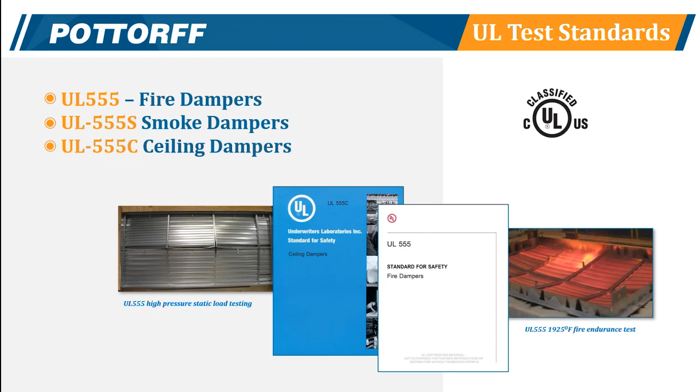So to start off with, there are 3 tests that we perform on life safety dampers generally. They're all UL tests. They're all 555 tests. 555 is a fire damper test, 555S is a smoke damper test, and 555C for ceiling dampers. And the way it breaks down is pure fire dampers have the 555 test. Smoke dampers, pure smoke dampers, are in the 555S. Combination fire smokes get both of those tests, the fire and the smoke test, and then the ceiling radiation dampers go through 555C.

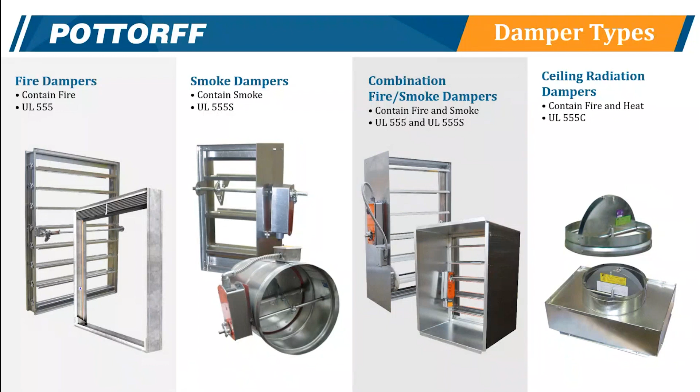So we'll talk a little bit about each test, starting off with 555, that's the fire test. And the big part of this test is the fire. We actually burn these dampers for an hour and a half or 3, depending on the rating we're going to. We have to test them both ways, vertically and horizontally, as if they were mounted in floors, if we want ratings for both. So you can't just test one way and have approval for both.

So we test both ways, and then immediately after the fire, we apply water from a fire hose to the face of the damper, across the damper, to see if the force of the water will open the damper up to the point where fire might pass through it. And that's the big part of the fire test, or the UL 555 test.

There are some more things that go on, particularly for the dampers that are rated to close under flow. We have a dynamic closure test, and that is where we run heated air through the damper and we close it several times to make sure that it will close. We only do that on the dampers that are rated for closure under flow. Static dampers don't have to have that.

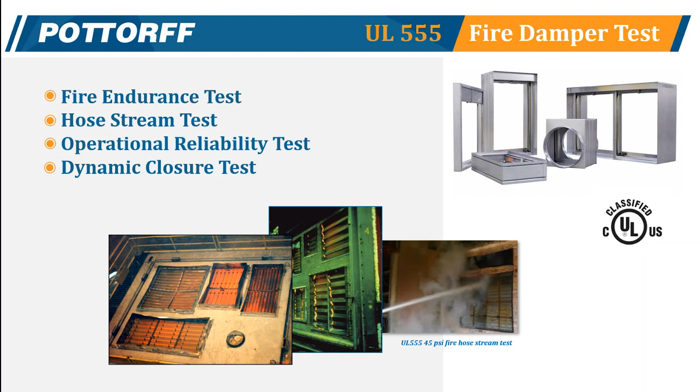555S is a smoke damper test. A lot of cycling involved in this test. The actuators get cycled several thousand times: 2 position, 20,000 times, modulating, 100,000 times. That takes a long time, so there's a lot of that. Again, some more smaller parts of this test, but also the leakage class. Of course, we're concerned about leakage of air through a smoke damper. We're trying to stop smoke, so we test them for leakage.

There's a leakage class that we rate these in. Leakage classes 1, 2, and 3, 1 being the best. 1 means that no more than 8 CFM leaks through the damper when closed per square foot under 4 inches pressure. Class 2 is 20 CFM. That's the minimum that's allowed in our codes for smoke. There is a class 3 that we really can't use, in the States at least, for smoke. But there are some class 3 fire smoke dampers out there that you might consider for a pure fire damper in certain situations, and I'll touch on that more later.

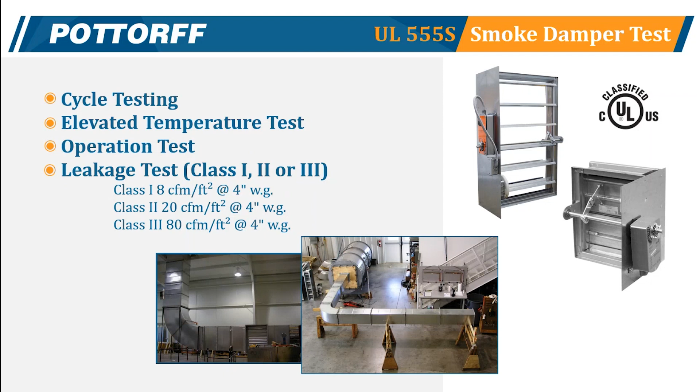Then 555C is the ceiling damper test. Again, sort of like the regular 555 test, there's a fire test involved with this. Ceiling dampers basically assume the rating of the assembly that they're going into. So we build an assembly that we want to be part of, and we burn it. And that's the big part of that. There are also some other smaller parts of that test, but that's the big part. So that's for ceiling fire dampers.

They are not interchangeable. So you cannot use a UL 555 damper in a ceiling or a 555C damper in a normal fire damper wall or floor. So I'll touch on that more later too.

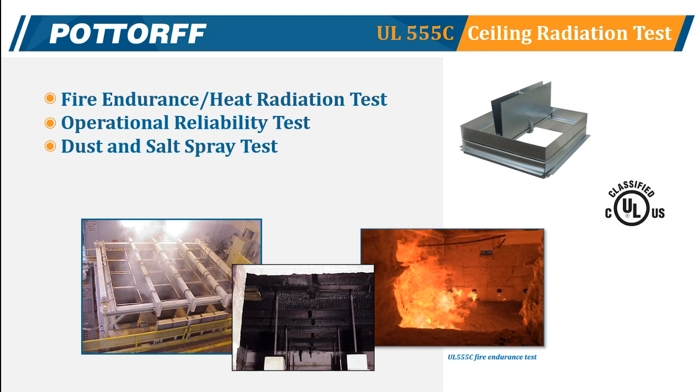So all these dampers will have a label on them to show you what they are. And this label usually is on the inside of the damper, maybe on a blade or the inside of the frame. And so for this example here, we have a fire smoke damper label. And it will show all of the ratings that this damper has.

All right, back to the label. So I mentioned that all these UL dampers will have a label on the inside of them to show you what they are. It will tell you what the damper is and what the ratings are of that damper.

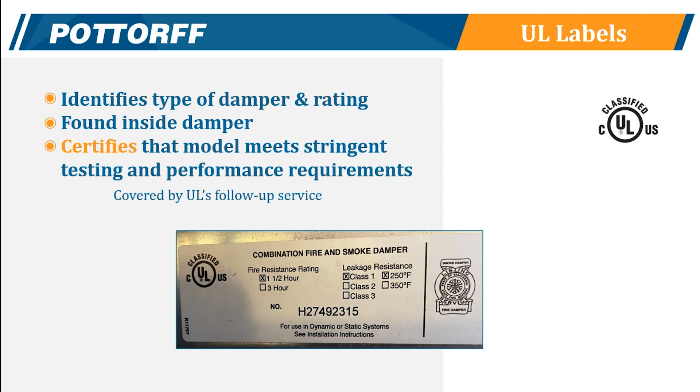Okay, so now we're going to talk about the different styles of dampers out there. And we're going to start off with fire dampers. Fire dampers are devices that stop the spread of flame across from one side to the other through ductwork in a wall or floor. They are automatic, so that's one thing that we mentioned here, and that I'll bring up is that fire dampers will come with the trigger or the link or fuse link that will close it.

So not the case with smoke dampers. Smoke dampers don't standardly come with a sensor for smoke, but fire dampers will. So they will automatically close whenever they get hot in the event of a fire. So three main types of fire dampers here. On the left, we have curtain style dampers.

We call them curtain styles because they have a series of interlock blades at the top of them that are held together or held up by a fuse link right there. And so when that fuse link melts, those blades fall and form a steel curtain and stop the fire from spreading across. Horizontally mounted, there are also springs to help close them, pull them over to the other side, and stop flame from spreading across. So curtain style is the most common type of fire dampers.

In the damper world, they're kind of the lowest cost. Everything, for the most part, is roll formed. Not a lot of human labor involved in building them, so the cost is somewhat low. But they are also somewhat limited in size and airflow. So multi-blade dampers in the middle here, that's another style.

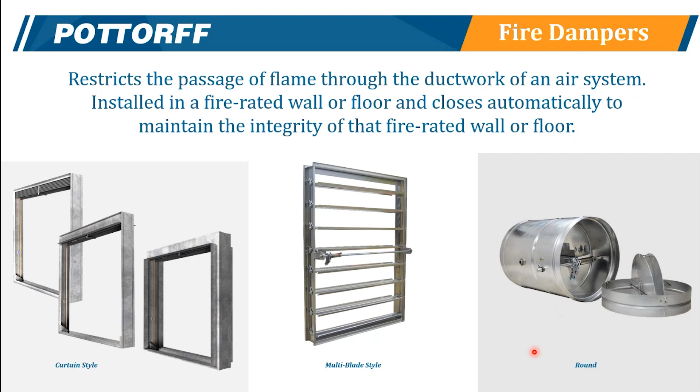And then there's also what we call true round dampers. So that's where the damper frame is actually round. Now we can do a square-to-round on almost anything, but these dampers, the frame is actually round itself. All of these are fuse link dampers, so they all have a melting fuse link that melts and will trigger the damper to close. Fire dampers are rated for a couple of different things. One of them is airflow, and the other is time.

So airflow, there are dampers that are designed to close with airflow moving through them, and those will close under at least 2,000 feet per minute, 4 inches pressure. And this rating applies to fire dampers and also to fire smoke and smoke dampers. All fire smoke and smoke dampers are rated to close under flow. Static dampers are dampers that are designed to close without any air moving through them. So to use them, your system must have provisions to shut down the fans, shut down the air handlers, etc. So if you have that, you might be able to use a static damper. Static dampers usually cost a little bit less.

But the main difference is really in vertical mount dampers. The dynamic dampers that close under flow will often use springs, and it's kind of hard to see, I know, in this photograph, but there is a stainless steel ribbon spring right here that connects to the bottom of the frame and to the first blade in the blade package, and there's one on this side too that you can't see. So when that fuse link melts, that snaps that damper down and closes it. Static dampers vertically do not use springs, so it'll look like this. There will be nothing there.

Now, not all dampers that are rated for flow will have these big ribbon springs. Some companies will use, on small sizes, a very small spring in the very top of the blades. But when they get very large, then they'll have these ribbon springs. Horizontal mount all use springs. So whether they're rated for flow or they're static, they will all use springs because that's what closes them.

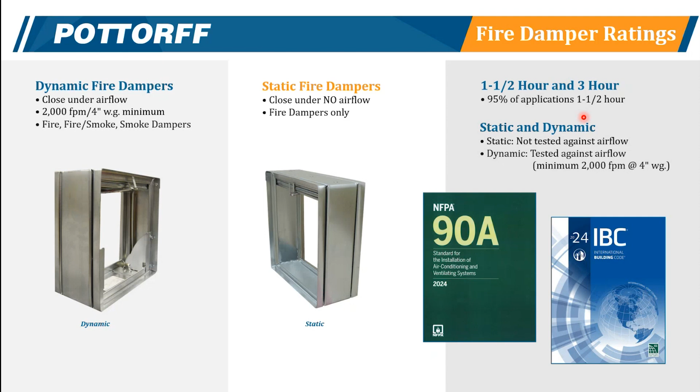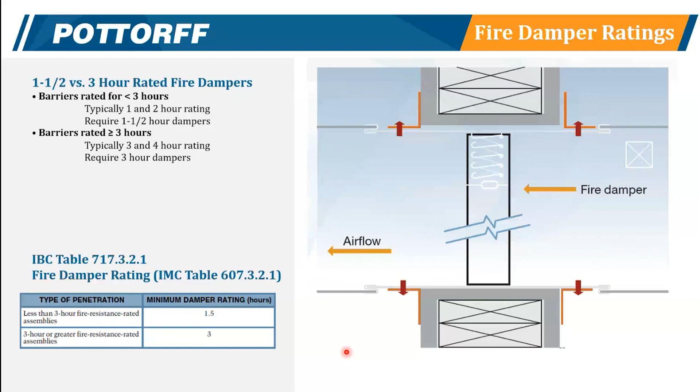And then time-wise, fire dampers are rated for either an hour and a half or 3 hours. Generally, the large majority of the dampers we build are hour and a half rated, but we do make a lot of 3-hour dampers too. So about the ratings, hour and a half, you might think, well, that's kind of a weird rating. And you might think, well, if I have an assembly greater than that, I need to use a 3-hour damper, but that's not the case. So the code says anything rated for less than 3, you use an hour and a half damper. So for example, if you have a 2-hour wall, you do use an hour and a half rated damper.

With these curtain dampers, we run into what we call the blade package, and that is the interlock blades at the top of the damper, like we have here. And now these photographs here, these are all small dampers. They're probably 8x8 or 10x10. They're very small, so the blade package is not very much. It's maybe 1.5 inches or so.

But these dampers can get much larger, much taller. And then when they do that, that blade package becomes several inches in height, and that's blocking your airflow on your duct. So we've developed different frame types that can help reduce the effect of the blade package on the airflow through it. So an A-type frame is a type that you connect the duct to the entire outside of the damper, the perimeter of the damper.

So everything is in the airstream: blade package, frame, legs, etc. It's all in the airstream. The B-type has a little hood or flange on the top of it that brings a top duct connection just beneath the blade package. And so it essentially gets the blade package out of the airstream.

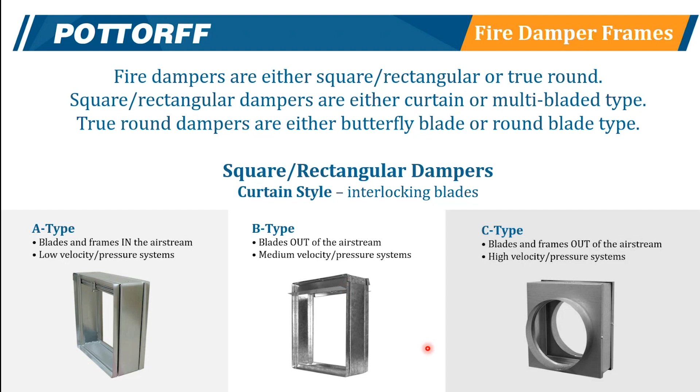Also, most fire dampers and fire smoke dampers need a sleeve, and the point of that is so that if something falls in the ductwork or in some way breaks the duct away, and most of these are connected to the sleeve with a breakaway connection, the sleeve will remain in the wall or floor with the damper in it and protect the opening from the fire.

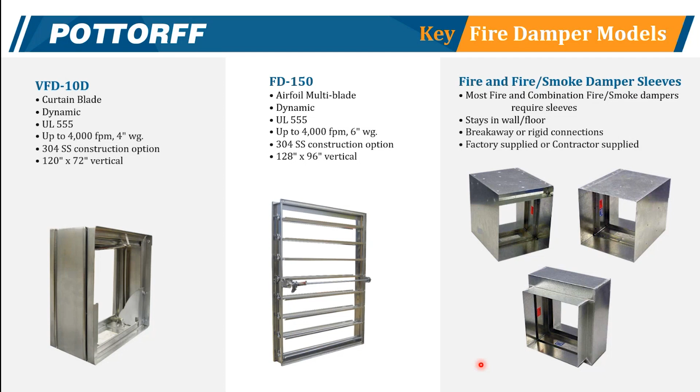Smoke dampers are devices that stop the spread of smoke. As I mentioned before, they're rated for leakage classes. In the States, we can use Class 1 or Class 2. The code doesn't really say you have to use Class 1 here or Class 2 there. It leaves it up to you, but the most critical places are probably where you want to use Class 1, like hospitals, schools, stairwells, etc. are all places where you might think about using a Class 1 rated damper.

They are rated for 250 or 350F. You would want to use a 350 rated damper, certainly if the damper is going to be used during the fire to create pressure zones and manage smoke. You would want the higher rating for that. And then all smoke dampers are rated for airflow. There are no static smoke dampers. They're all rated for at least 2,000 feet per minute, 4-inch pressure. The actuators on smoke dampers and fire smoke dampers have to be provided from the factory. We have to mount them on the damper.

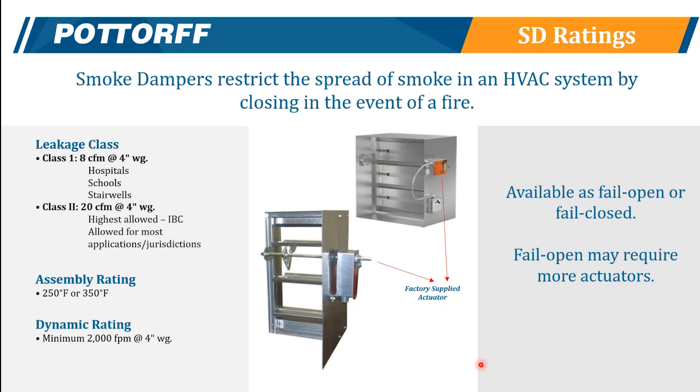We cannot provide these dampers without them and have the contractor put them on out in the field. So they have to come with it. Most smoke dampers are fail closed. That's kind of the way that they started out and the way that most of them are, but there are some fail open options. If you have, say, an example where you want to move smoke out, you want to purge smoke in the event of a fire, you can have fail open, but it may affect the number of actuators on the damper. It may have to have more to be fail open.

And then the combination fire smoke combines, of course, the fire and the smoke damper together. So it's leakage class rated, it's temperature rated, it's rated for airflow. The actuators are mounted on them at the factory. And I'll mention here, I think I touched on it before, but Class 3 fire smoke. Now, codes, well, you must use at least a Class 2 rated damper here in the States. But a fire smoke damper, as soon as you hook it up to power or hook air up to it, it's a fire damper. And you don't ever have to connect it to anything to do with smoke. It can be used as a pure fire damper.

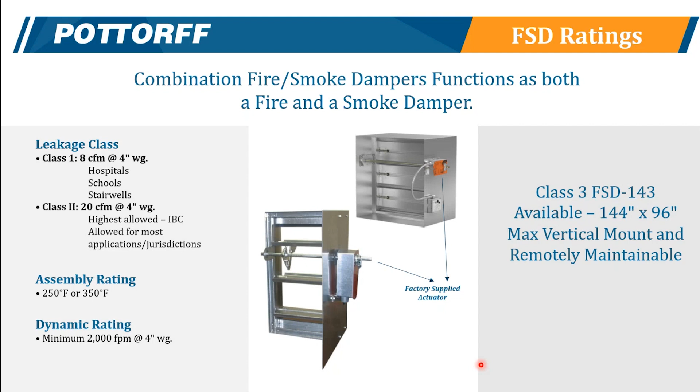And these FSD 143s can go up to 144 by 96 vertically. So they go quite large. It's the largest fire damper that we offer. And that's typically going to be the case with a fire smoke damper; it's typically going to be larger than most fire dampers. So in situations where you've got very large sizes or where your damper will be in a place where it's going to be very hard to get to it after it's put in to maintain, you might consider using a fire smoke damper. The codes now allow motorized dampers with blade position switches to be remotely tested or cycled, which is required now. So it's another reason why you might think of that. Food for thought for you there.

304 stainless is optional. Modulating and vertical blade options are also available with this model. Now that's not on all fire smokes. Only certain models will have those options, but this model does have that. Modulating allows you with a signal in to manage the blade position and basically use your fire smoke damper like a balancing damper until there's a fire, and then that part is overridden and it becomes full closed generally in the event of a fire. So 128 by 96 max size with the FSD 151.

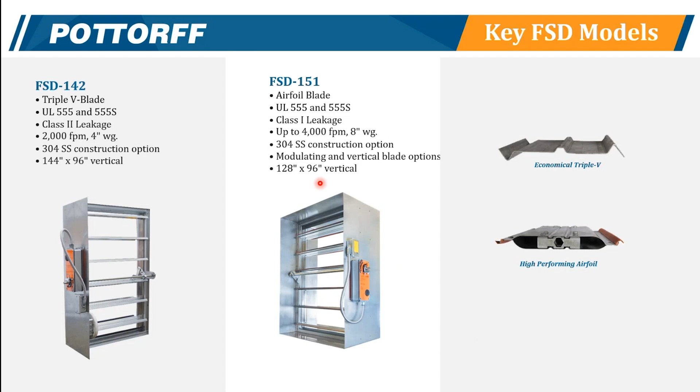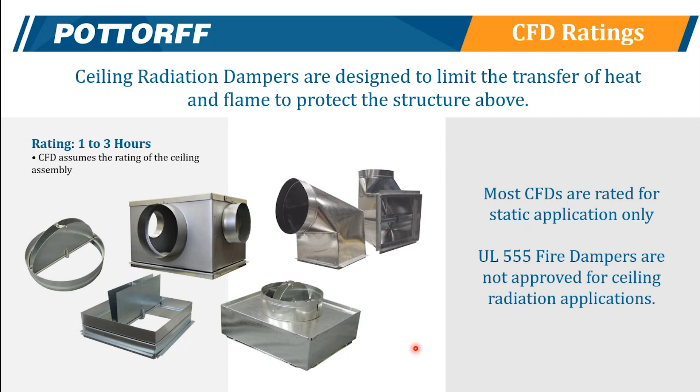Ceiling dampers. So this could be a whole other talk on itself. This is a lengthy product line, and it's a little bit tricky on how to apply these, but we'll hit the very high points here. Ceiling dampers do two things. They protect a floor ceiling assembly or roof ceiling assembly from both fire and from heat. So that's a big difference. A UL 555 fire damper protects from fire but does not protect from heat, but a ceiling damper also protects from heat. So that's one of the reasons why you can't use a normal 555 fire damper in a ceiling.

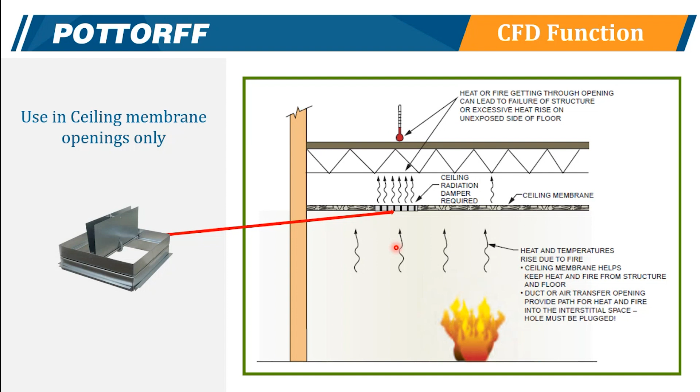And this is an example of what we're talking about: a floor ceiling assembly. Imagine this being a wood structure. Generally, these are most often used in wood structures. So you'll have a wood truss assembly here, and when you penetrate just the lower membrane of this assembly, the ceiling part, that's where you use a ceiling fire damper. You don't use it in the floor. If you were going all the way through this assembly with, say, a duct or a shaft, you would not use a ceiling fire damper. It might be a 555 damper, might be a fire smoke if it's a shaft, but not a ceiling fire damper. But if you're just going through this lower part here, that's where you use a ceiling fire damper. And that damper is protecting not only from fire, but also from heat that radiates up. Radiation damper is another name that is commonly used for these, and that's why.

Hey, James, we have a quick question from Matthew. Does the modulating type damper remember its balancing position after a fire?

That's a good question. I don't know the answer to that one. We will have to find that out, and we will get back to Matthew on it. Yeah, I'll make a note of it.

Okay, thank you. So these ceiling fire dampers, unlike a normal fire damper, assume the rating of the assembly that they're going into. So basically, they're listed in the UL listed assembly. For example, L521 is a listing for a wood truss system that is a UL listed assembly.

To find that, you can go to UL's website. UL has a search called Product IQ that is free to use. If you know the listing number of the assembly, you can type that in, and it will bring up a PDF of the listing. In that PDF, you will see what that assembly looks like, what it's made of, and what dampers, if any, are allowed.

Now, sometimes you'll pull these up and it'll be an assembly that dampers are not allowed in, and that could be a problem. But generally, if dampers are allowed, it will specifically tell you what models, what brands are in it. So we encourage you, number one, find out what the assembly number is. Sometimes that's not easy to do, but you want to do that, and then check your listing on UL to make sure the dampers that you want to use are in that.

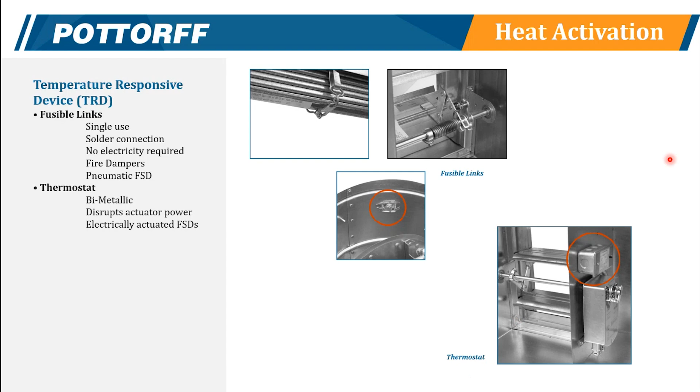Smoke dampers are a little different story. Smoke dampers do not standardly come with a sensor to sense smoke. They typically will need help from the system outside of it to close it. Now, smoke detectors are available. We can provide them with the dampers in a sleeve, and we have flow types and no flow types available.

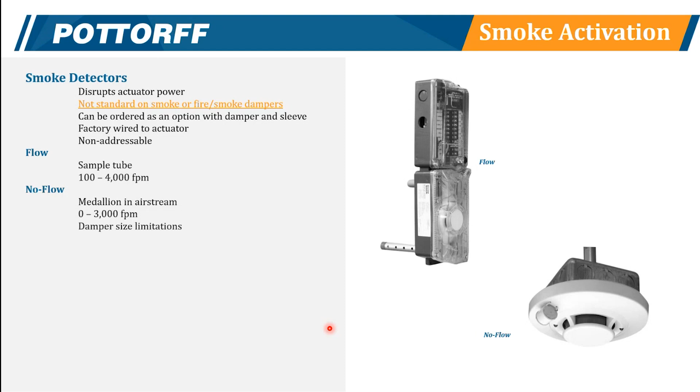But it's not standard. It's an option, and generally, of the total number of dampers we build, we supply a fairly small amount of them with these. A lot of times, a different trade will handle the smoke system, so we don't have it. But it is available. It is an option. You do have to specify it and order it.

Actuators, I touched on that a little bit before. Actuators on smoke dampers and fire smoke dampers have to be provided from the factory. They can be externally mounted so that they're out of the air stream like we have in the top picture, or internally mounted so that they are in the airstream. There are size limitations on how small we can go with an internally mounted motor, but there are options. Generally, these are two-position spring return, so they're full open, full closed.

24 and 120 volt are very common. Some will go up to 230. Modulating is an option for some models, so you can manage the position of the blade with a signal in. Pneumatic is also available still. That's something we don't sell a lot of right now. It used to be more common back in the day, but fewer and fewer, mostly retrofits now. The volume of those is small enough that we don't keep a lot on hand, so it might affect your lead time a little bit if you go with that style.

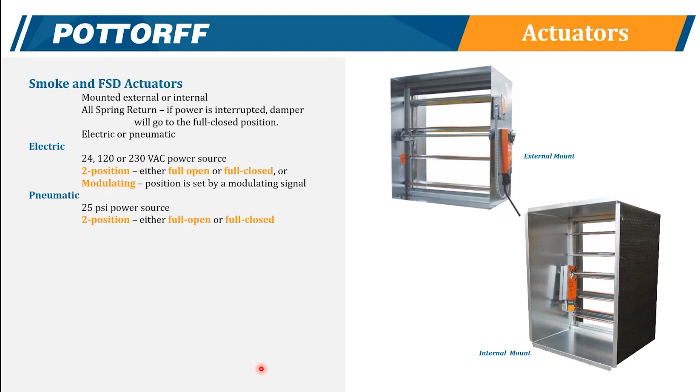Okay, now we're going to get into a little bit about how you install life safety dampers, just touching on the very high points. The first thing I'll mention is that you always want to go to the installation sheets for the precise models that you're using. We get asked from time to time, what's a good general detail I can show on my drawings of how to mount a fire damper that would apply to all? And the answer is there is none. A lot of us are very similar in how you mount these, but they're not exactly the same. So you want to follow the exact details of the models that you're using.

So getting it, and so we provide these with all these dampers. So every order there will be a physical set of these that ship out with the damper, and then if they are lost for some reason, they're very, very easily found on our website. Now I will show you in a few slides where to find those.

So starting off with smoke dampers. Smoke dampers are a little easier because there's fewer rules with them. For example, they don't have to be in the wall. They don't have to be sleeved. They can just be mounted in a duct, etc. They can be up to 24 inches outside of the barrier. You just can't have anything coming out of the duct in between the barrier and the damper. There are some rules about mounting the damper frame into the duct, and maybe some sealing involved, but that's it.

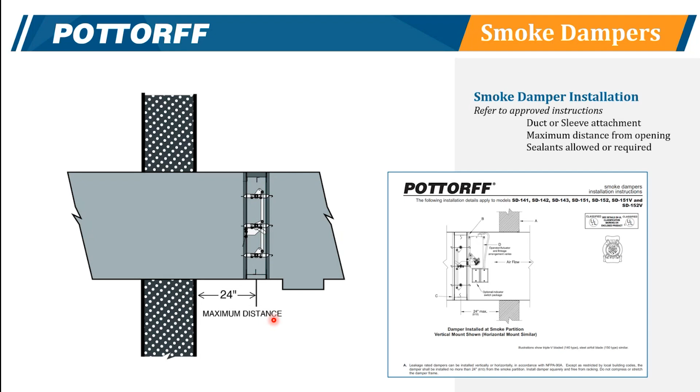So they're pretty simple. Fire dampers, they're trickier. There's more rules with them. Starting off, typically they have to be in the wall, in the plane of the wall or the floor that they're mounted in. So when we're showing a curtain style damper here, when that fuse link melts and that curtain falls, that curtain must be within the plane of the wall or floor. Now we show it centered here. It doesn't have to be centered. It could be more to one side or the other, but it has to be in the plane.

That's probably 90% of the fire dampers that you see. There are out of partition dampers available, and some call them out of the wall dampers, where they can be outside, and we'll touch on those too, but generally that's the case. They have to be within the barrier.

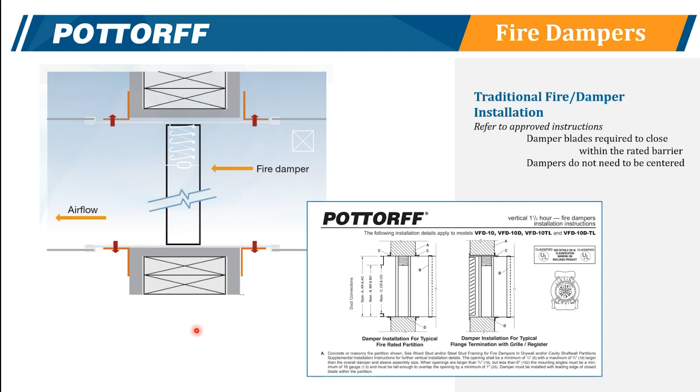Hey, James, I have another question. Yeah. This is from Lucas. I understand that fire dampers do not require sensors or power because of the fusible link. However, are they required to have sensors to have them monitored by the fire alarm system? No, they are not. Now, we do offer a blade position switch that would trigger when a curtain damper is closed. We do have that, but it's not necessarily required. And we have blade position switches also for the fire smoke dampers too. And I think I have a slide on that, so I'll touch on that too.

Okay, so angles are typically used to mount these fire smoke dampers. They do two things. They hold them in place on the wall or the floor, but they also seal off or safe off the gap in between the damper and the opening. There has to be a little bit of gap there. These dampers, when they get hot, they have to be allowed to expand, but not bind up so they wouldn't close. So there's a little bit of gap, at least an 1/8 inch around them. So the angles help safe off that space, and then they also hold the damper in place.

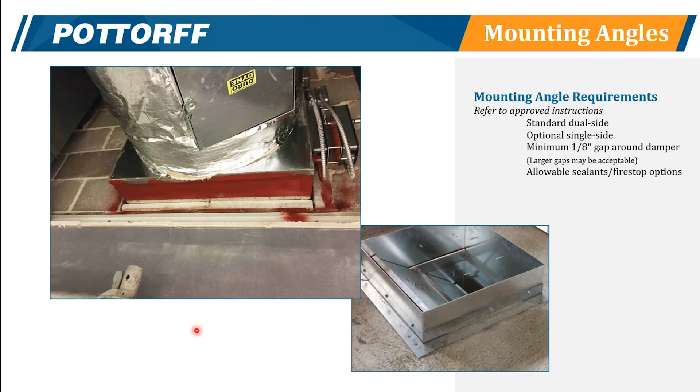Now, 1.5-hour rated dampers up to a certain size, a pretty good size, can be mounted with angles on one side of the barrier only. They don't have to have them on both sides. Both sides is an option. You can put them on both sides, certainly, but you don't have to. And that's all shown in the sheets that come with the dampers. There are some size limits. They're only for 1.5 hours, but that is an option. Getting your inspectors to accept that may be another challenge for you, because sometimes they won't accept angles on one side, but that is allowed in certain cases.

So I mentioned there are out of partition dampers where the damper can be out of the barrier. This is an example here. We call these OPs, and the sheet here is our installation sheet for some of our fire smoke models, the triple-V and the airfoils. And these can be up to 12 inches outside of the barrier. And how we do this is the sleeve is wrapped in a fire and heat resistant blanket to protect it from the heat. And that allows it to be outside.

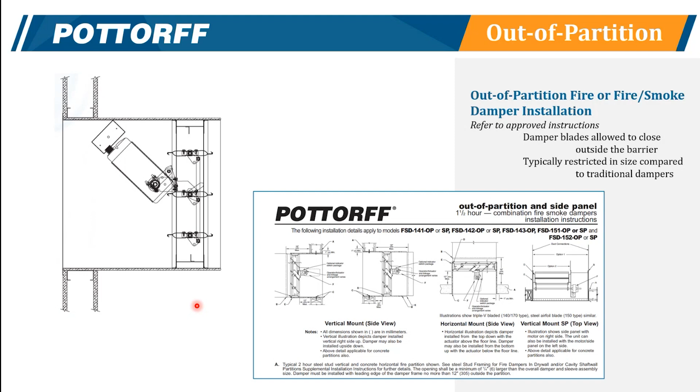There are some size limitations, though, with these. That's the main thing to keep in mind, is that these don't get very big, generally about 3 foot square. It'd be about as big as they usually get. Some might get a little bit larger, but we do at least have that size. So it could be a solution for you if you have a problem on a job where you just can't get the damper inside the barrier. You might consider an OP style damper.

Also, sort of the same vein, another out of partition style damper is our side panel dampers, and these are dampers that are designed specifically for use in shafts and rated shafts. Knowing that it's very difficult or impossible to get to the backside of the damper, it's installed in a shaft. These dampers are provided with a front flange.

You slide them in from the front, and then you run screws or rivets through the sleeve into the shaft wall framing, and that's what holds them in. You don't have to get to the backside to put anything on the back of them. The actuators are here in the front, so you can get right to them. If you terminate here at the damper, you can install a grill and put that there too.

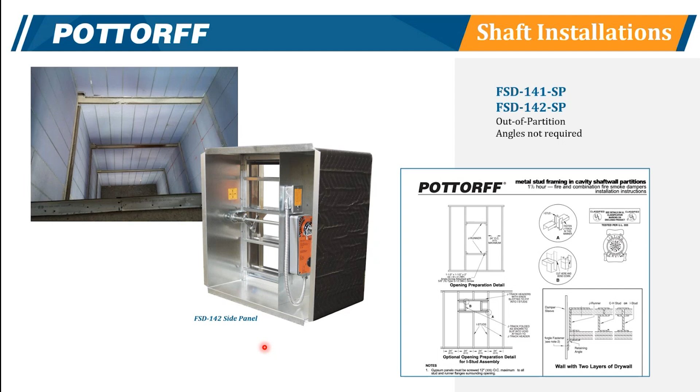So very, very nice option for you for shafts. Again, sort of limited on sizes. They'll go a little bit larger than an OP, but not much. But most of the time these openings are not huge to begin with, so they work fine.

True round dampers. These are dampers where the frame itself is round, and we make these in fire smoke dampers. We do 6-inch to 24-inch. Sometimes we're asked, well, do I have to cut a round hole for these in my wall? No, you can do a square hole. Our mounting plate is a square plate, so square hole works fine. But very, very nice option if you're using spiral.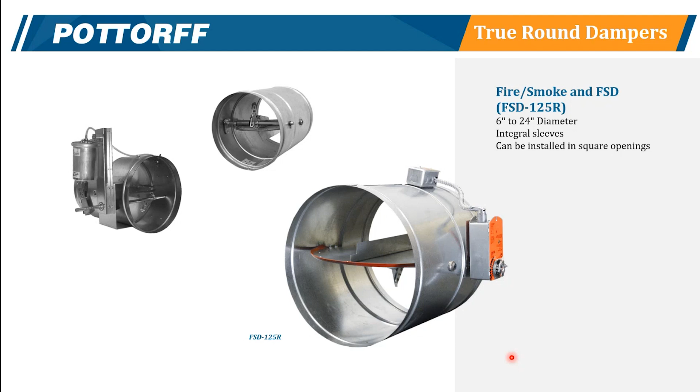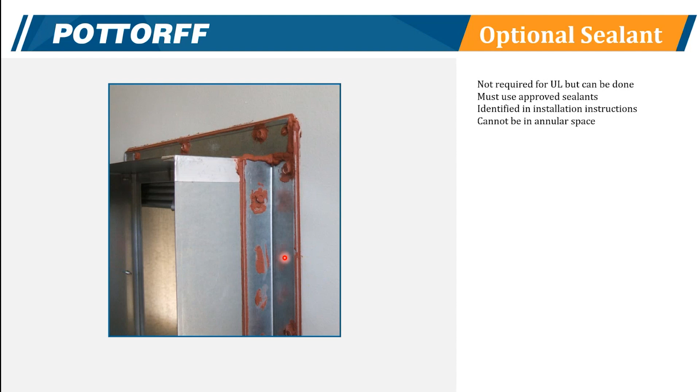Now, sometimes we're asked, do I have to seal the angles and the fasteners and such on the damper for the UL listing? And the answer is no. You don't have to do that. You can do that. You have to use the right sealants. There's only certain sealants that you can use. But if you're concerned about leakage out of the duct through the screw heads or around the angles, you can seal all of that with the proper sealant. So that is an option.

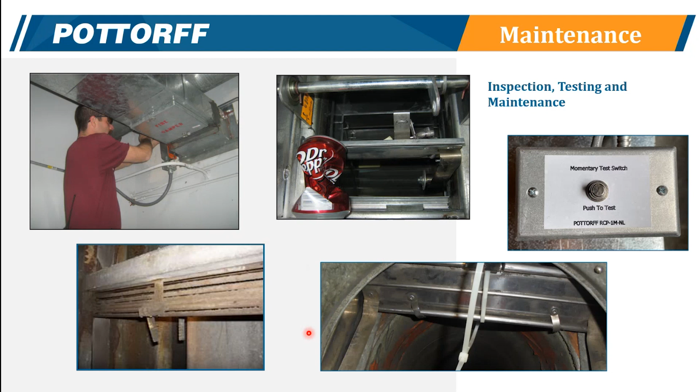So the IBC refers to NFPA for maintenance and testing of dampers, NFPA 80 for fire dampers and 105 for smoke and fire smoke dampers. What 80 says is that there's a series of tests to perform on these life safety dampers to make sure they're working correctly. There's one right after you put it in to make sure everything is in place and working. Acceptance testing happens generally whenever the system is cranked up and turned on, and it's often when the building is turned over.

That's the acceptance testing. After that, 1 year after the acceptance testing, and then every 4 to 6 years. 4 years for normal commercial buildings, 6 years for healthcare. Healthcare groups lobbied to get a little bit longer cycle so that people didn't have to shut down their systems as often and get in their ceiling tiles and stuff. So they go 6 years. But what that means is that the building owners are supposed to cycle these dampers, and in the case of a fire damper, they have to close it and reopen it every so often.

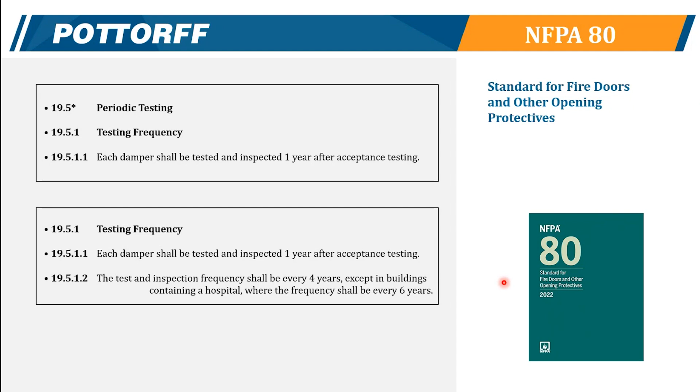With pure fire dampers, that means you have to get to the damper. There's no way to close it without removing the fuse link and letting it close and then reopening it and reinstalling the fuse link. That's the only way to do it. And you can imagine a healthcare facility, for example, that's got thousands, or at least hundreds, of fire dampers. That's a big job. It's a big task.

NFPA in 2019 revised the language of the standards to allow remote testing of motorized dampers with blade position switches, so that you can remotely test, say, a fire smoke damper that has an actuator and blade position switches to indicate when the blades are closed and reopened. So that's a big change. That allows a building owner now to maintain these without actually having to get to the dampers.

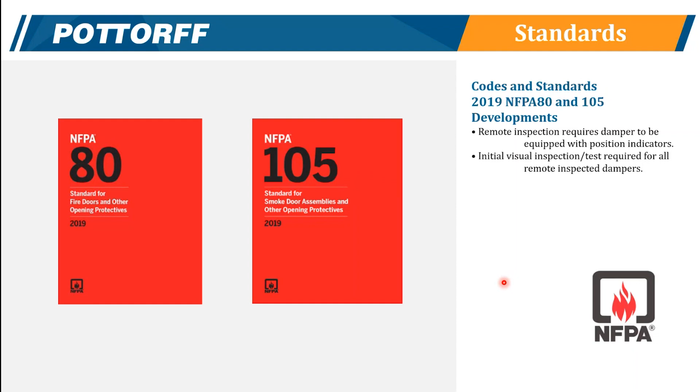The language says you have to witness the first remote test. So the first time you trigger the damper remotely, you have to see it, make sure it's working. After that, you don't have to see it again. So huge thing. Another reason why you might consider a motorized damper in lieu of a pure fire damper. So we offer some options to make it easier to maintain and test these dampers.

Remote control panels, or for us, RCPs, is one way to do it. These combined with the blade position switch will allow you to close the damper by just flicking the toggle switch here. In this case, this is our RCP1 panel that has red and green lights to show you when the blades are open and closed.

These are connected into our PI50 blade position switch, and so you can see very easily when the blades are open and closed. These are options. These are not standard. You need to specify and order these to get them, but they are optional, and it makes it easier for the person or the group testing these to actually do that. And they don't have to be on the damper. This one is shown on a damper, but they could be remotely mounted too.

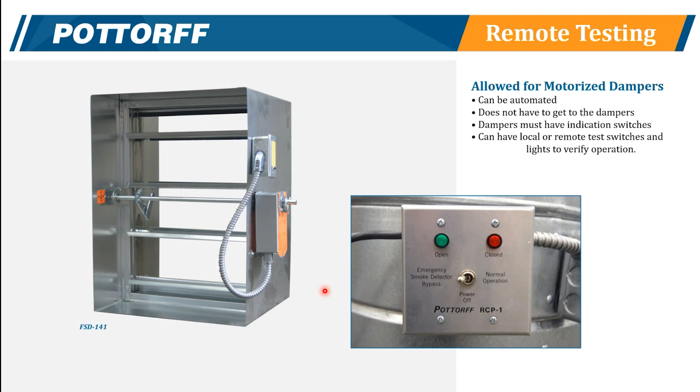The PI50 blade position switch is a switch that's built into the frame of the damper that makes whenever the blades are open and when they're closed. So it will send a dry contact signal out that will tell you when the blades are open and closed. And then the RCP remote control panels are the panels that have the switches that allow you to test. This RCP1M has what we call a momentary test switch. It's basically a kill switch.

It's a spring-loaded button. As long as you hold that button in, it breaks the power of the motor and lets the motor spring the damper closed. When you release the button, the power resumes and the damper opens. It can be provided with lights connected to the PI50 that will show you when the blades are open and closed, or it can just be the box with the switch. But all of these are optional. Again, not standard equipment, but they are options.

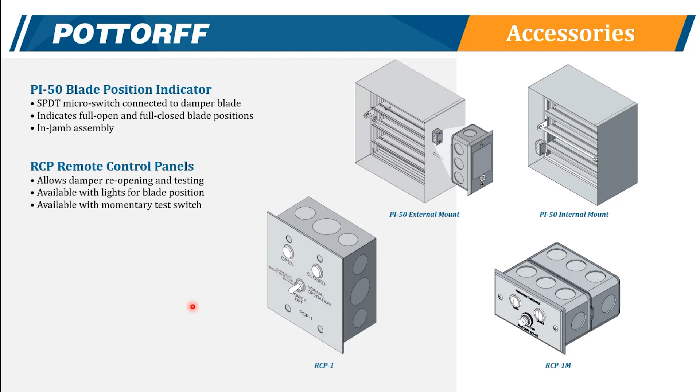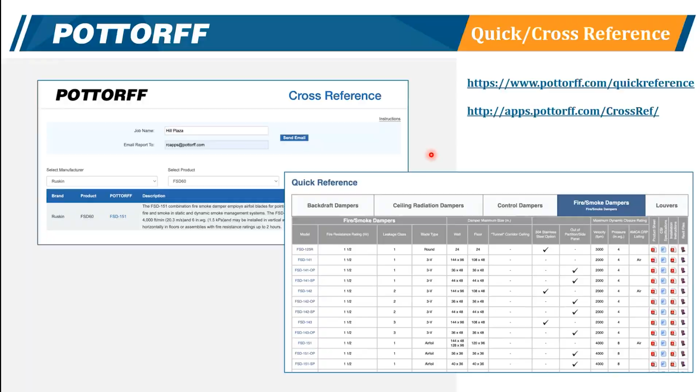So lastly, just a couple of things more. On-time delivery: we feel that we have the shortest standard lead times in the business. And we also have an excellent quick ship program where you can get products in 7 days, 3 days, and even next day. All of our products are made in the USA by union laborers, so we're an all U.S. company. We are compliant with Buy American, Build American, all those things that you see sometimes on jobs now. We have a customer service team that is top notch. We have a full 5-year product warranty on all of our products. We already talked about the cross-reference a little bit.